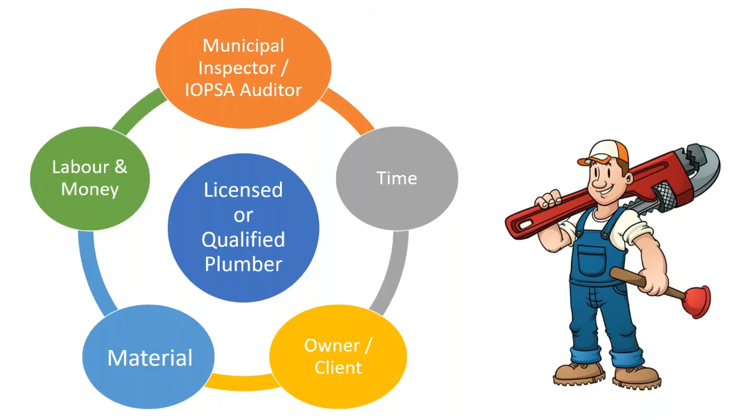When we're looking at a licensed or qualified plumber doing work, there are a number of factors that need to be taken into account. Stresses and pressures that are being applied from all over. For argument's sake, we're looking at that on top because that is where the final closeout of that project falls. But in the meantime, the plumber's got to worry about labor, money, time, the owner, material, all kinds of other things.

So the one thing that you do not notice on that list is paperwork. We're all familiar with this little slide or meme, whatever you want to call it: the job is not done until the paperwork is done.

Before I get into the actual plan requirements, you would have seen this thing a number of times before on some of my presentations. Let's call this the level of authorities. We've got overarching legislation, the Health and Safety Act and the Consumer Protection Act, which basically covers everything else. Then we have the actual legislation, the acts, the National Building Regulations and Standards Act.

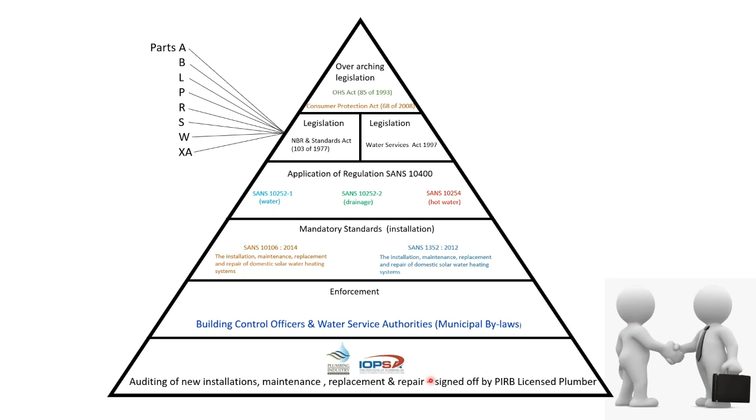So you'll see I put this in here on purpose. We're not here to start a fight with the local authority or the building control officer, because I can guarantee you that's one you're not going to win easily. So we'd rather come in peace, and see that there are some common grounds and benefit for both parties in working together. So there are two sets of building plans, or two aspects to submitting a building plan.

The first one's water. Let's look at water, and let's settle something very early on. Every other week or every other day, you hear people talking about how water is not in the building regulations, only fire - or that building control is not worried about the water installation on a building because that doesn't form part of their very important National Building Regulations and Standards Act.

In that same SANS 10400 Part A under the admin, although this falls under the informative section, it is very clear that it says the Water Services Act enables the Minister of Water Affairs to prescribe compulsory national standards - not nice to have, not this way or that way. It is a compulsory national standard relating to consumer installations, and in this regard it defines a consumer as any end user who receives water services from a water services institution, including an end user in an informal settlement.

A consumer installation, which is what we are busy with, is a pipeline, fitting or apparatus installed or used by a consumer to gain access to water services, and it includes a meter attached to that pipeline, fitting or apparatus.

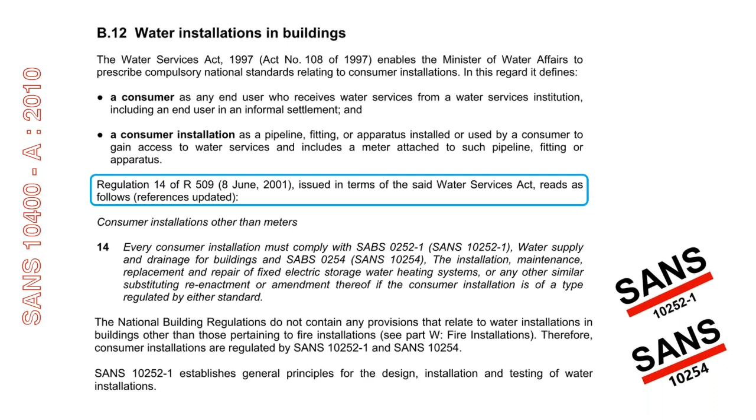There are requirements, and when I spoke to Steve about doing this presentation, this session is in order for the plumbers out there so that when you see a building plan or something you need to quote on, you need to make sure this document, if it hasn't got stamps on it or a note saying it's been approved, please revisit or confirm with your client that this is indeed approved, and that would be your starting point. If there's any dispute, for the guys that remember, we did the TAC resolution around rational designs and that.

Once you've notified your client, whether it be the owner of the building, the developer, the builder, the architect, or the local authority, that there's a problem with the design, or that doing the work as per the design is going to end up being a non-compliance and couldn't be signed off, then that notice forms part of your COC that you'll sign at the end, but you have to do that up front.

It's not once the building inspector gets there and fails the job, or the water and sanitation department's plumbing and drainage inspectors in some local authorities, that's not the time to go hunting for a design.

So if we look at water, initial design considerations, straightforward: the following information as necessary shall be obtained from the owner of the premises or from the water supply authority or the designer. Take note, there's no plumber there.

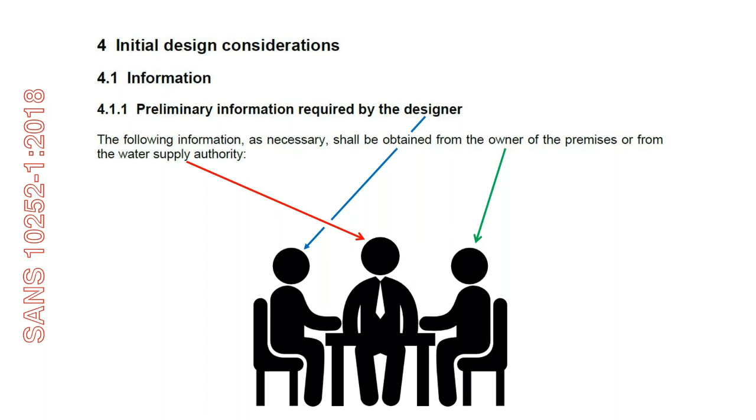You're more than welcome to assist, or you'll probably get contacted if you're one of the more senior guys in the group or in the session. You'll find this would be approached by the client, or by an architect or designer for some help. But notice there's no plumber included in the standard—it says these three people will be responsible for that design.

Included in that design will be a plan of the site showing contours, proposed and existing floor or terrace levels, all related to a geodetic datum, and the location and description of any services on site.

Why would that be important as far as our plumbing is concerned? For every 10 meters of elevation, you're losing more or less 100 kPa in pressure. So if it says existing floor or terrace levels, and you're looking at 10 stories at plus minus 3 meters each, that's 30 meters.

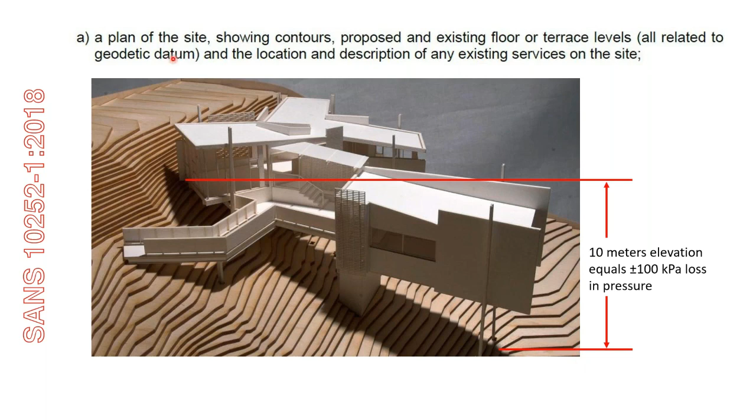So 30 meters has quite a considerable impact on your actual water supply. When it comes to a design, that's an issue, so the requirement is for levels all round.

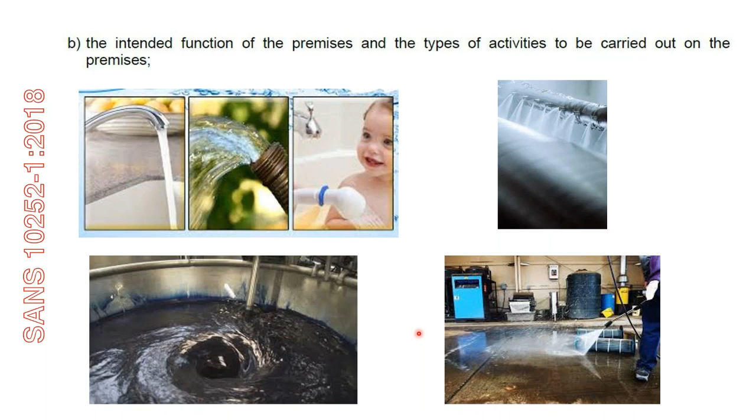The intended function of the premises and the types of activities to be carried out on the premises—in other words, is it a normal residential H4 dwelling? You'll see paper milling, industrial cleaning, textile dyeing, whether manufacturing or dyeing, the volumes and the actual supply quality or pressures all accounted for.

Point C says you need a drawing of the building showing the points that require water and the proposed type of sanitary fixtures that go in there. If you look at this layout, you'll see it's very clear. So now when you look

at the plan as a plumber, and that's what most of the council guys do—oh yes, I can take that waste pipe out there, that's outside—that could be done quite easily, as opposed to some other designs that we'll have a look at a bit later on.

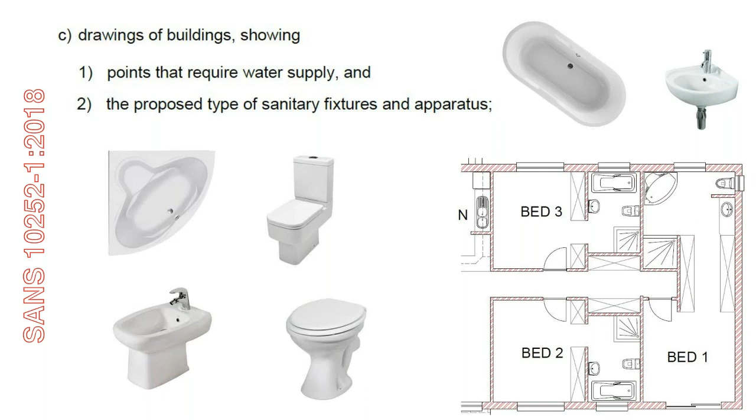In bigger, more upmarket or expensive buildings, there's usually a schedule of sanitary fixtures and apparatus requiring water supply. When this comes out, whether as a bill or an attachment or one of the sheets on the building plan submitted, it's the perfect opportunity to look at a product and check the code. When quoting and you see a name you can't pronounce or aren't sure about, mark it with a question mark. Then as you go through the list to price, confirm which are compliant products, ticking the ones you have a query on, even before buying the material.

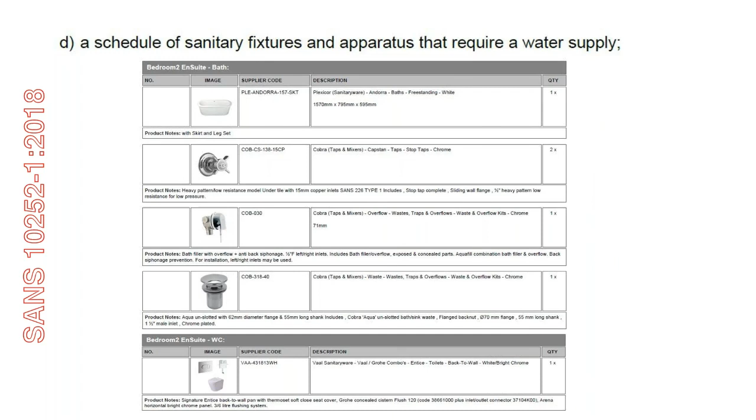E says you need the design population of the premises and the times the premises will be occupied. That relates to water consumption, energy efficiency, and overall supply design. These are different tables from various documents. I picked H1, a hotel occupancy where persons rent furnished rooms not being dwelling units, as opposed to H4 which is a normal house. The design population for H1 is 2 people per bedroom, since most hotels have double beds. The design occupancy time for H1 is 24/7, because you've got people cleaning, staying over, coming in late or early, so it's occupied around the clock. That's for E.

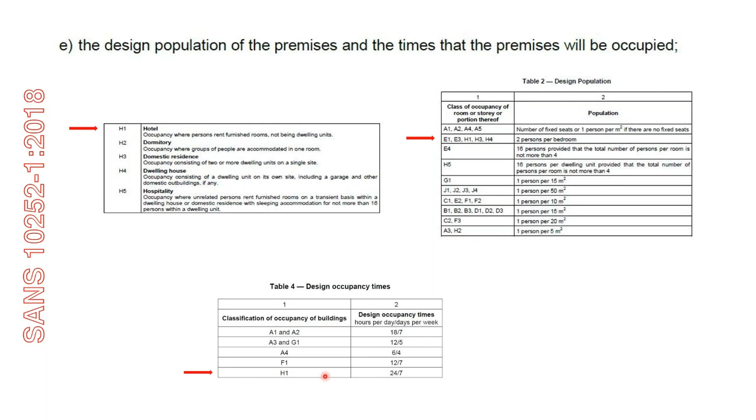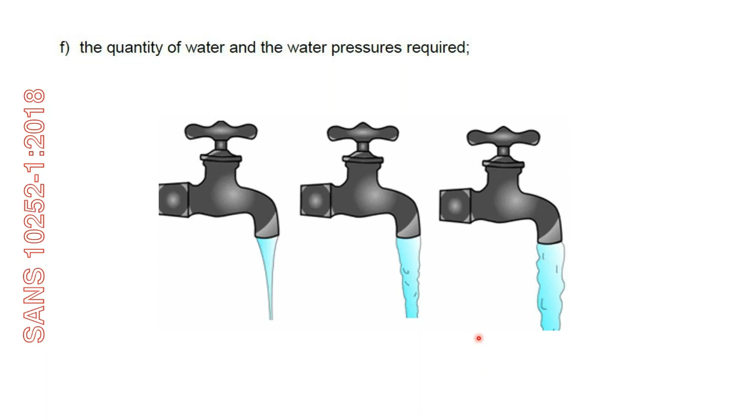Next is the quantity of water and water pressure required. We looked at that industrial cleaning example earlier. A normal single residence isn't as big an issue as a 10 or 15 story hotel or a university dormitory. So the plumber needs to know this quantity from the building plan submission, and that needs to be sorted out between the client and the designer.

Then there's the nature of the subsoil on site. For those who attended the 10252 part 1 sessions, you'll know copper can't go into ash, or anything with salt or ammonia, and you'd look at PVC pipes in heaving clay. There are various restrictions on what material can be used in which areas, and that forms part of the design.

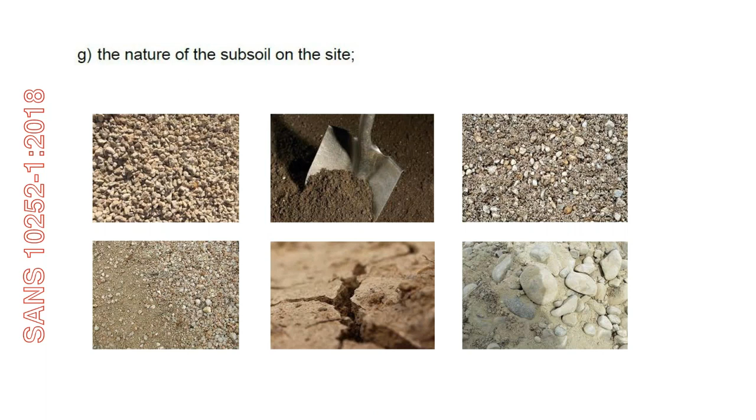And then the quality of water obtainable from the supply mains. This one is difficult, guys - I could have just put a normal glass of water there.

Instead, let's look at this table quickly. You have raw water from dams and rivers, which gets piped or gravitates down from the catchment area to where screening happens - removing fish, branches, leaves, and bigger debris. Then coagulant is added, which looks like purple-colored salt crystals. You throw those crystals in, and as particles and dirt attach to them, they settle at the bottom of the sedimentation tank. Then it goes through filtration, with different types used in different areas by different local authorities or water supply authorities, though they basically work on the same principle. Then pH correction and anti-corrosion agents are added to protect your plumbing from being eaten away, followed by chlorination, and that's how it ends up at your house.

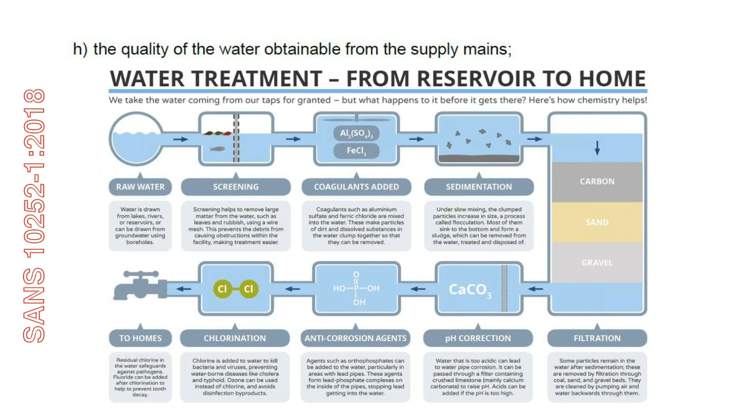So when it comes to the quality of water obtainable, these processes differ from region to region, from one water supply authority to another. If you have a hard water area, or water treated differently than other areas, the local authority can advise you on the quality of their water. It should be SANS 241 Part 1 and 2 compliant, but it's best to confirm with the area. Once you've worked in an area for a while, you know what you're up against compared to other areas.

The static and, where possible, residual pressure in the water supply mains. So static being what is available to you, and residual being that once the design has been done, or the pipe sizing and fittings and all the rest have been done, whatever remains in that installation, that would be your residual pressure.

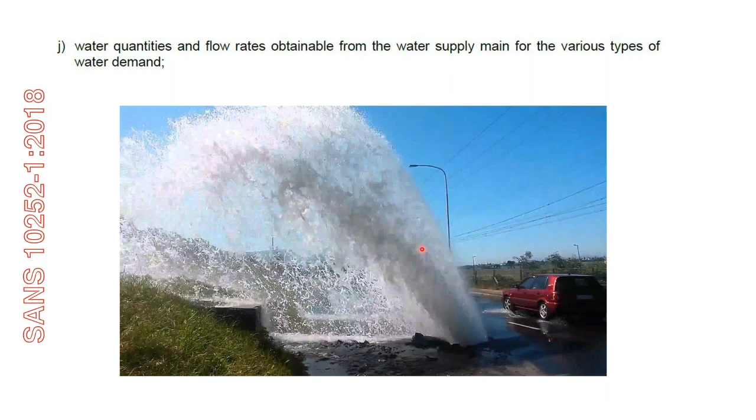Water quantities and flow rates obtainable from the water supply main for the various types of water demand. So if you had to build a house on the left-hand side here, and that's the supply main in the street, you know you're not going to have a hassle as far as getting water to your premises is concerned. Okay, so a bit of homework to be done between the designer and the owner.

Schedule of acceptable pipes and water fittings and the size of the water meter. Requirements for drawings and other information that has to be submitted in order to obtain approval. Any special precautions to be taken for the crossing of other services on the premises, and details of existing connections and services.

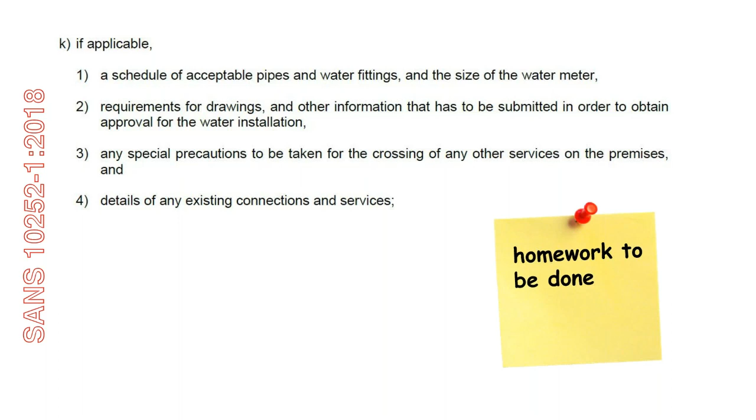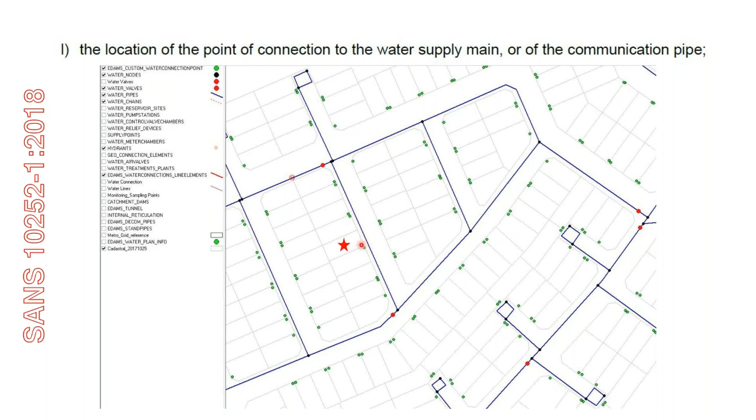M says we need details on the metering of the water installation, and that includes sub-metering. A couple of local authorities, when you try to submit building plans with multiple units, will actually inquire as to your sub-metering, because unless there was provision made, you'll find that guys will rather apply for exemption because there's no room or they didn't know about it. It is now part of the requirement, metering of the water installation. In other words, not just the bulk supply, the whole installation. So it includes the sub-metering.

If the owner has to connect the water installation to the water supply, the following details: if it's to be connected to the mains or to the communication pipe, the details of the size and type of material of piping, and if the installation is connected to a water meter, the details of the size and type of outlet of that water meter. So this would be for a UPVC main bolted on there, and then you carry on the other side of that water meter.

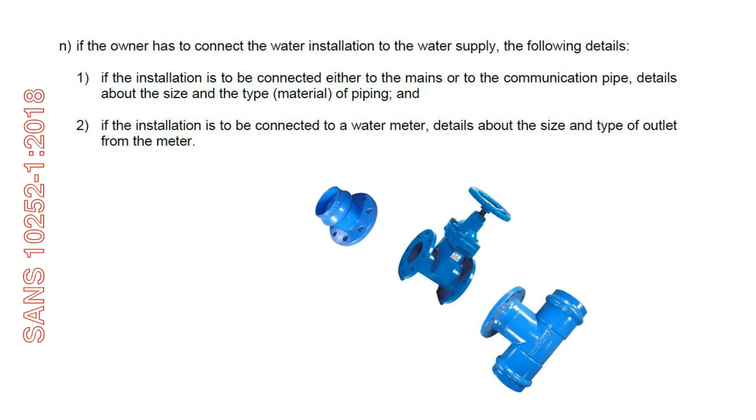Then just a quick look at some of the notes. Items A to E and G can be obtained from the owner, F should be determined by the design process, and H to N should be obtained from the water supply authority. So basically what we've gone through at the moment, you'll see that the owner is responsible. He'll tell you he's got the idea. He will tell you what the purpose of the building is, what type of fittings he wants to use, the schedule, how many people are going to be in there, subsoil.

He bought that property, so between the designer, the local authority and the owner, they should have that information. Quantity of water required, that would be for the designer. Sometimes a dangerous thought, but the quantity of water is there. And then the water supply authority, or the local authority, municipality, whichever way you want to refer to them: water quality, pressures, flow, services, connections, metering, and size of the connection. All of that can be obtained from the water supply authority.

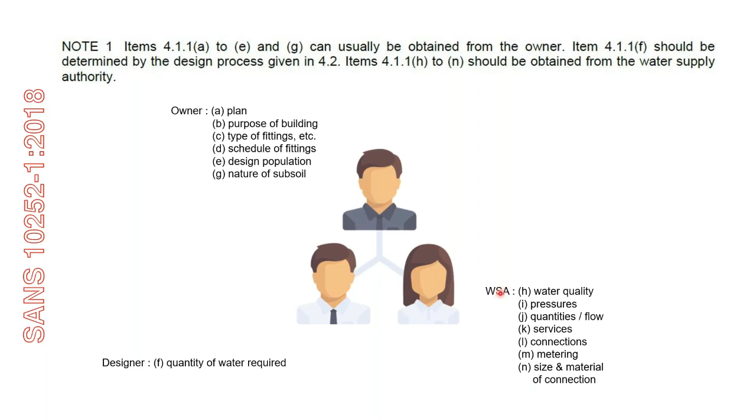Note 2. Information required for the approval of water installations.

Title deed, we're not going to worry about. Name of every street on which the premises abut. So you'd like to know where it is.

Scales of the drawings, north point, position and size of the communication pipe serving the premises, location of every water fitting and its description, location and capacity of every storage tank and water heater. Take note, water heater as well. Details of the proposed accommodation for the water meter, if it's to be installed within the premises, the pressure for which the installation has been designed, and the position of overflows.

So if we do a bit of semantics, overflows could be discharges. Let's have a look at those. You see the smallest one right down the bottom, last but not least.

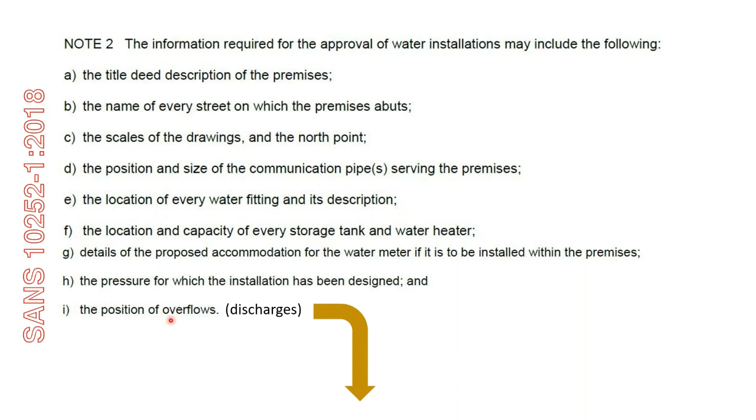If we are looking at discharges, we're looking at drip trays, where the water storage heater, complete with its components, is installed in a manner and position where any leakage can cause damage to the property. It shall be furnished with a drip tray.

So that's what the plumber's book says. You'll find, by the way, for the guys taking screenshots, the bit down the side is the reference to the actual document that was taken out.

So snap away. Then it says here that the tray shall be led to the outside. By the time the design is done and the owner and architect have sat down and looked at this, the client says, but sir, I would like exposed trusses. So they go, okay.

We can do that, put a note on there, we describe it to the T, and then the plumber gets there and he goes, okay, but now I need to take a tray out. That could be boxed in like that back section.

So how do I get this to the outside if that's currently being built, or that is part of the building, and this is in a proposed extension? How do you run it through there? These things need to be sorted out up front.

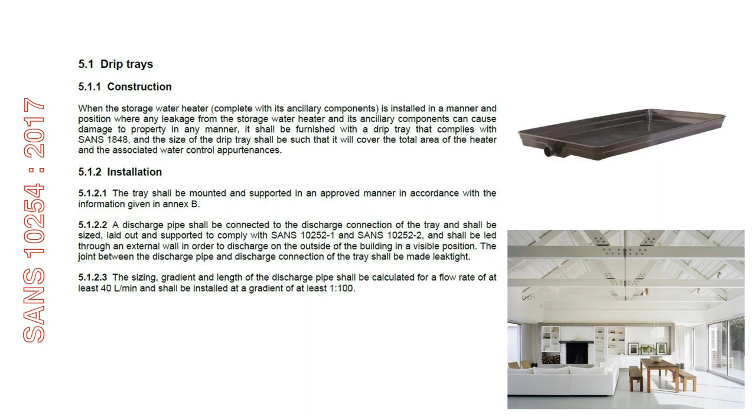If not, you might find that you run into one or two of these where the only way past that was a concrete beam over it. We don't need any of that.

This one here, the squeeze was so tight you couldn't get it further out towards the outside, so you had to do a bit of a MacGyver to get it going back to the outside.

Or if you're really in trouble and the designer says, you know what, it's only a 50-liter geyser, let's not bother about a tray or anything above the ceiling, then the plumber gets left with a comment like that, or this is the installation that you end up running into.

It becomes the plumber's problem. And nowhere in this document has the plumber ever been mentioned once. We're getting to that still.

Discharge from valves, from 10254. It says that discharge pipes from expansion control and safety valves shall be of a size not less than the connection. It shall be a maximum of 4 meters, and after 4 meters you increase the size over the total length up to a maximum of 9 meters.

So if we now look at this building here, that requirement under note 2 says show the hot water cylinder. So we've shown it, or someone has shown that on this very simple drawing.

The building's 22 meters, so if we're in the middle here, that's 11 meters to the outside. There's no way that's more than 9 meters. So somewhere along the line, when this drawing gets put in front of you, you need to go, hold on a second, we can only have a maximum of 9 meters.

Can the hot water cylinder be repositioned? Yes, then move it to the right place. The note says show it on the drawing as to where it should go.

Not, okay, the plumber comes to site, oh no, look here, we can't do this more than 9 meter thing, I say we move it over here. That's not your job. It's a handy thing to have a plumber like that on site, if he can actually advise you into which way we can make the thing work.

But then by changing that design, you actually become responsible, because the client will come back in 2 or 3 weeks, your geyser's up, everything's there, and he comes along and says, but I don't want the geyser there, that's going to spoil where the kids need to play, and someone needs to move that.

So unless it's in writing, if it's not written, it's not said. So unless you have a VO saying that we can deviate from this approved layout or this submitted and approved drawing, then you know you're in for a bit of moving around and chasing your own tail at your own expense, because the original design says that's where it should be, and it was never clarified after that.

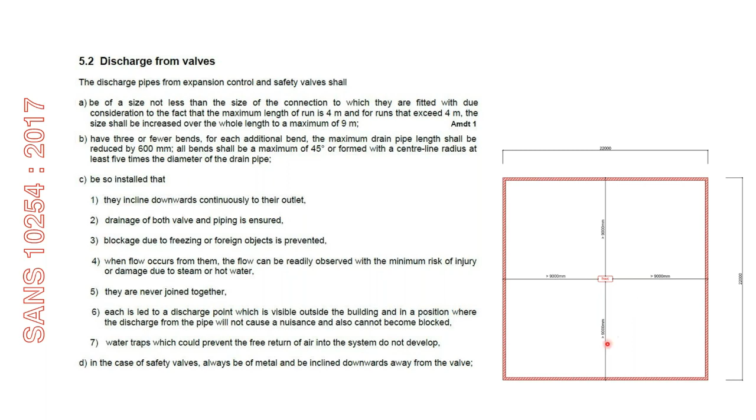Short and sweet of it is, we've looked at the requirements for building plan assessment, or the information required on the actual building plan indicating water or the water installation. If you look at 10252 part 1, 4.1.2.2, where water supply installation is to be extended - in other words, you've got an existing system - the existing system shall be examined to ensure that it's suitable for extension. So it's not, you know, maybe if he's a decent architect he'll do it,

or maybe we can ask the plumber while he's busy here. It says there the existing system shall be examined to ensure that it's suitable, after which the entire design shall be reassessed and modified by the designer as appropriate.

Our local authority - fortunately for the plumbers in the region, I'm involved as far as the plan approval is concerned - when you do a submission of a building plan to the Nelson Mandela Bay Metro, we actually ask for a water reticulation layout and pipe sizing. That needs to be on the drawing.

I know it's not a legitimate requirement as far as residential premises are concerned. It's normally for the bigger buildings when it comes to sizing. But as far as the local authority, we require that you indicate pipe sizing, should it be upsized, the material used, all types of material available out there. So put your notes on your plan. Your client pays you to do a submission of a building plan, so put it on there and we'll assess your drawing as you submit it.

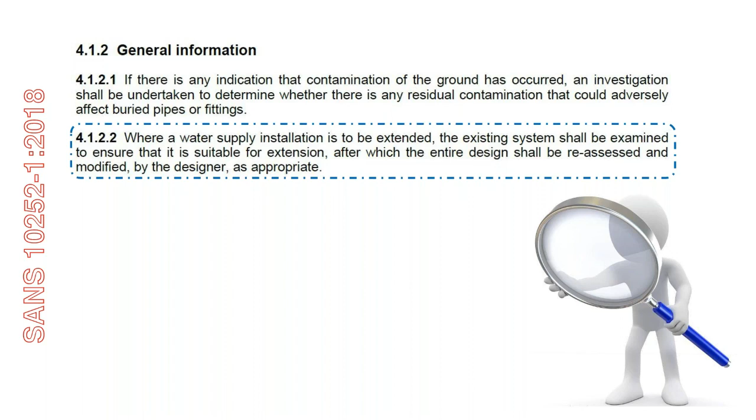One of the reasons we tended to do it on all plans was that you do get buildings that change use. So when we're looking at change of use, all of a sudden Part T becomes a reality in people's lives. Here you can see, in this case, there's a half-inch supply to that hose reel at the back of this industrial building. So good luck putting a fire out with that and persuading your insurance that that was sufficient protection. Here you've got a 22 mil polycop.

So it's plastic, it's undersized, it's all kinds of things, but it won't fly. The thing around hose reels is simple: for the purpose of firefighting, they'll be installed in any building of 2 or more stories in height, or in a single story of more than 250 square meters, at a rate of 1 per 500 square meters or part thereof of floor area in any story, provided that such hose reels shall not be required in H4 - in other words, residential dwellings - or in an occupancy classified as H3, which are sectional title units, where each unit is provided with independent access to ground level.

So if you have your own little unit in a sectional title complex and you can get out of the building, whether it be back or front, then you're sorted. If it's a high-rise thing and you've got one escape passage and it is more than 2 floors high, then you'll find that that would require a hose reel.

The thing is, even if it's a ground floor like a normal house - I'm sure most of you've got areas or regions in your area where they've taken older houses and converted them into offices, or a guy might run a home office or a small business from what used to be a normal house. If there's anything in storage, there's a requirement for fire protection. So if your existing system is a half-inch polycop supply from the water meter to the building, then rest assured that your fire protection is going to be insufficient. So when it states size, or when it requires size, these things do play a role.

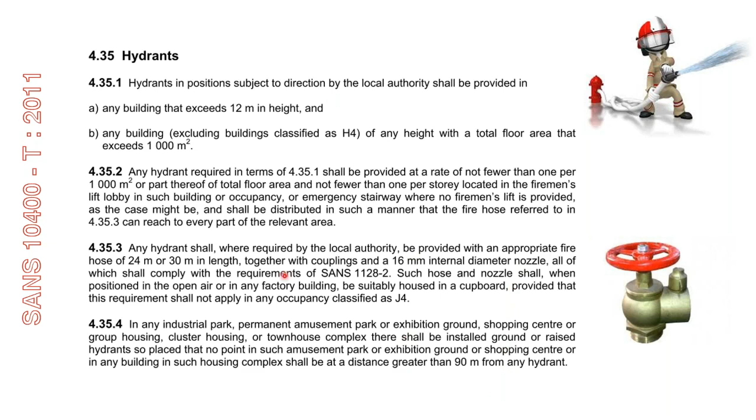The reason I pulled in the hose reels and the hydrants is for the simple reason that if we go back to SANS 10252 Part 1, which is our document, pipes in any fire installation or combined installation - so you don't necessarily have to have a fire installation, it could be a combined installation.

Shall be combined, being potable and fire, shall be sized according to a rational design, where in any fire installation the nominal diameter of a communication pipe serving such an installation shall be at least 75 millimeters. So if there's a fire installation or combined installation, you're looking at least 75 millimeters. A pipe supplying a fire hydrant shall also be at least 75, except where the length of that pipe exceeds 50 meters - then the nominal diameter of that reticulation shall be 100 millimeters.

That is for the premises. So once you've got an incoming main of either 75 or 100 millimeters in diameter, we now move into the building, and it says a service pipe supplying water to a hose reel on any one story of a building - so you have to picture multiple stories, say 2 or 3 stories high.

It's in excess of the 1,000 square meter limit or allowance that was made, so now we need to know the requirement per story. Once again, for the guys that haven't attended the water one, this is how you cheat on it: you see the 2 from 25 says 1 or 2, the 3 says 3 hose reels, the 4 says 4 or 5, and the 5 says more than 5.

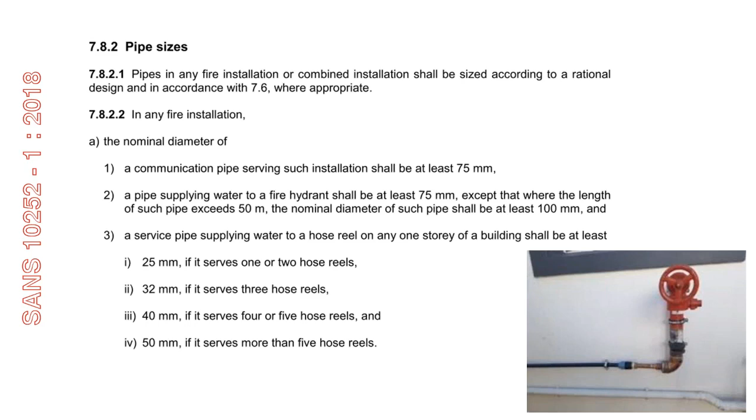Between the shuttle valve and the reel, if I remember correctly—sorry, let me just get back to my notes—that would be the arrangement. You have a union between the hose reel, and then you have that specific fire stop tap. It's not a ball cock or ball valve; it's one of these slow turning taps. That is the accepted practice when it comes to installing a fire hose reel. Trying to think why I would have failed the copper, but as far as I can remember, that is a standard connection for a fire hose reel.

We are going to get those questions on an email, are we, Jock? Yes, we are. Okay, then I'll follow up with that gentleman. But that, as far as I know, is what a service core connection to a fire hose reel looks like.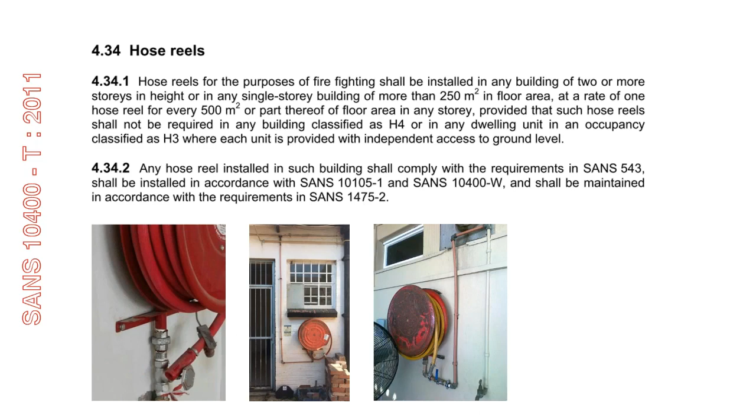Right, the next one. Is non-return allowed on fire? It's not only allowed, it's compulsory. The standard says that any connection between potable water and fire water shall have backflow prevention. Depending on the position and actual layout, most of the time where the potable and fire supply split, that is where your backflow prevention is—so that if extra pressure is applied or that filthy water gets into the fire system, we don't want that coming into contact with a connection of potable water. So yes, most definitely it's a requirement.

If the metered outlet is too small, do you therefore have to contact the municipality to change the meter accordingly, so that you may have sufficient supply for both fire and usage? Yes, it's part of the plan approval process. You'll find, I know eThekwini's got water inspectors—we've got a couple of guys that do these plan assessments for the water network. If you motivate or indicate on your plan why you would need a bigger water meter, they'll work out a cost and come and do the installation of that upsized meter. So yes, that's the theory.

Can a fire main be part plastic if below ground? Yes, look, you do get UPVC mains underground, and then when they branch off, the standard says anything above ground can't be plastic. So if it's UPVC underground—by the time the soil is heated up enough to melt that PVC pipe, I think there'd be nothing left of the building. So yes, if it's underground, definitely underground—I'm not talking about just under the surface, or maybe there's a changeover between the metal and the plastic. I'm talking about underground—that would be acceptable, but anything above ground needs to be metallic.

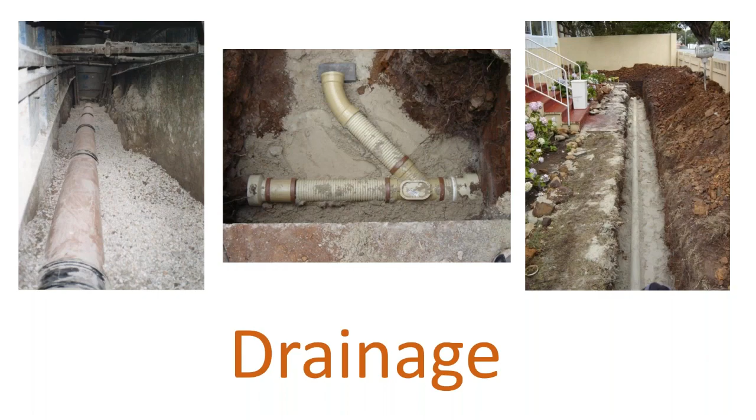When we're looking at drainage, the building control officer looks at drainage completely differently to how they look at water, because Part P is part of what they should be enforcing.

So I only put your National Building Regulations - it should be the National Building Regulations and Standards Act, blah blah blah, but for short, NBR P2.

Listen to these following requirements, and then think about how many drawings you see that do not have them indicated. We'll go through them all, but just quickly.

Any drainage installation in any building shall be designed and constructed so that there's an adequate number of sanitary fixtures provided in relation to the population and class of occupancy of that building. Yet we still have people standing in queues in public buildings trying to get to a toilet.

Such an installation is capable of carrying the designed hydraulic load. Such an installation is capable of discharging into any common drain, connecting sewer, or sewer provided to accept such drainage or discharge.

All components and material used in an installation is watertight. No nuisance or danger to health will be caused as a result of the operation of any such installation, and any drain in that system is of such a strength, having regard to the manner in which it's bedded or supported.

That it's capable of sustaining the actions to which it may normally be subjected, and that is, where necessary, protected against damage. All sanitary fixtures are located so that they are easily accessible to those persons they intend to serve.

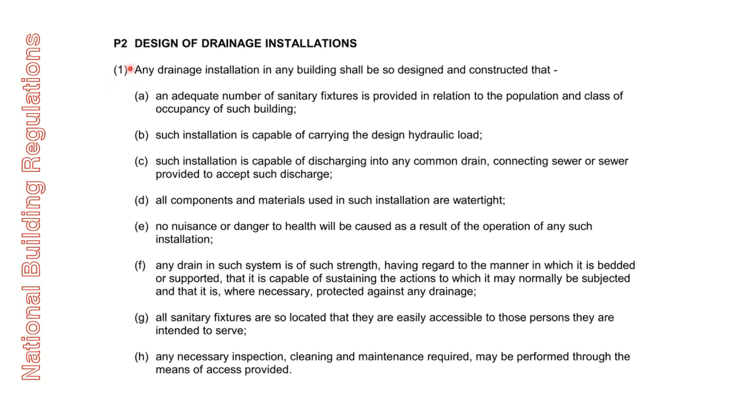That's P2(1). P2(2) is the kick in the gut for most designers that aren't qualified. The requirements of sub-regulation 1, in other words what we just looked at, shall be deemed to satisfy where that installation complies with SANS 10400 Part P. Take note, it says SANS 10400 Part P - in other words, the whole document.

You can't pick and choose, saying I'd like for this to happen and that to happen. You either comply with the whole thing or something else.

Provided that where a local authority is of the opinion that the size or complexity of that installation in any building renders it essential for that installation to be the subject of an approved rational design prepared by an approved competent person, that local authority shall in writing notify the owner of that building of its reasons for the necessity of such a design, and may require such an owner to submit for approval plans and particulars of a complete drainage installation based on such a design.

In writing - I can tell you already the surefire way to do that is you fail the applicant's plan, and once that plan is deferred with the comment 'drainage not approved, engineer's drawings required, or drawing from a competent person,' that is in writing. So the client will be notified, and they will get back to a rational design a bit later.

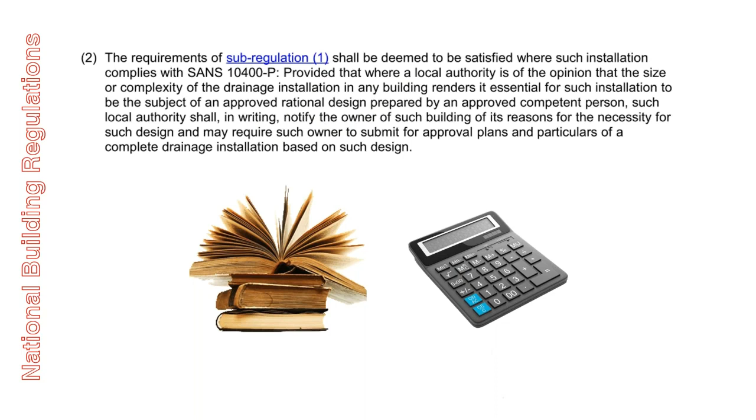Like I said, 10400 is the BCO's Bible, that's what they claim to operate from. So if we start with Part A, an application: the designing, planning, and supervision of the erection of any building or structure, or the performance of any function in connection therewith in terms of these regulations, is subject to the provision that the person undertaking such work or performing such function is required to be registered.

Take note - so the person doing the designing and submission of building plans to council shall be registered in terms of the Architectural Profession Act, Engineering Profession Act, Natural Scientific Professions Act, Professional and Technical Surveyors Act, or any other relevant act.

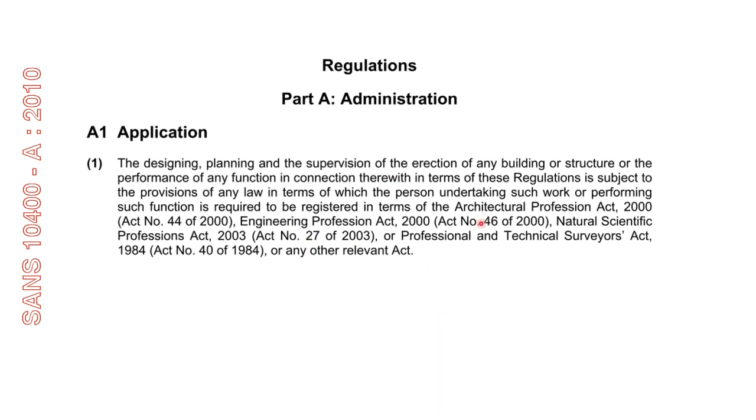It does not include plumbers. It does not say, nowhere does it mention a boumakelaar plan. It doesn't say, 'you know, I was in a tight spot, I had an afternoon to do it before the tiler or the guys putting concrete down came in.' It needs to be done by those professionals taking responsibility for that.

A2 says that any person intending to erect a building shall submit to the local authority the following plans and particulars together with the application: a site plan, so we know what we're doing or where we're heading on site; layout drawings, showing what those bathrooms look like, where the toilets are, where the ducts are; and a drainage installation drawing - good heavens, can you believe that? SANS 10400 Part A, A2 says you need to submit a drainage installation drawing.

How many of you have seen that?

Plans, drawings, and diagrams shall be of a suitable scale selected from one of the following. The site plan, we know we need that, so they can give it to us in any scale. The local authority may accept a scale not provided for, depending on what the designer did or how big the sheet is that they're submitting, whatever. The point is, along with the site plan, we need plumbing installation drawings.

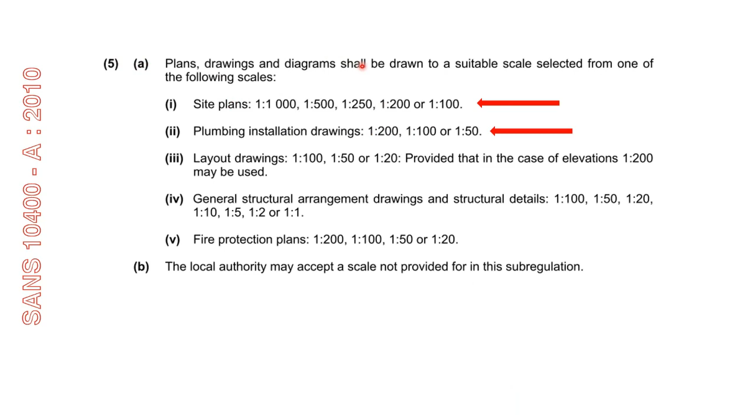Wow, we don't see those too often. The book says it shall be drawn to that scale - you need to submit that.

So it's not, 'you know what, Mr. Plumber, you're being difficult,' or 'Mr. Plumber, we'll get back to you or whatever.' It's part of the BCO's Bible that they refer to all the time - it's just a necessity for them to pull it out.

But those are just for the drawings. Let's look at the actual plan submission.

Any drawing of a drainage installation as contemplated in Regulation A2 shall contain as many plans, sections, and elevations as may be necessary to show, where relevant, the following.

Depending on where you submit in the country, you'll need floor plans and a layout section through the building, where you cut away the building to see if the drain needs to be suspended under the floor and that there's enough headspace. Elevations show the plumbing as well, so you can see the position of the stacks, where they end up going past windows or around them. We'll get to all of those, but the point is, the drawings shall contain as many plans, sections, and elevations as necessary to show this.

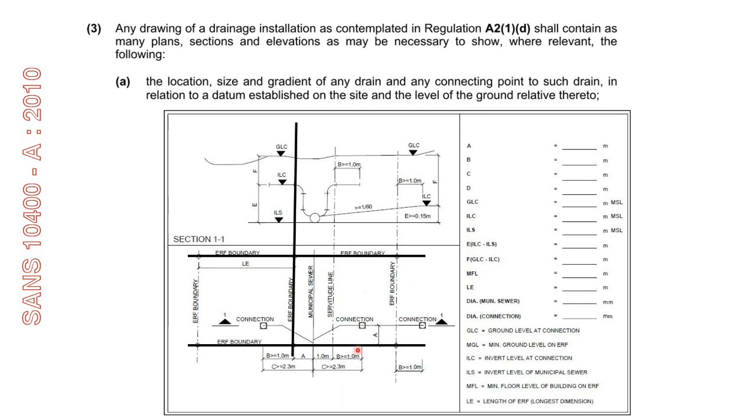I hope that answers that gentleman's question.

B says you need to show the location of any point of access to the interior of the drain.

Yeah, there's about 10 or 12 different places. This 1 hour session is too short for that. You'll have to have a look at one of the drainage webinars. What I can tell you is that there are 4 types basically referred to in these drawings. An inspection chamber, it's not a fancy name for a manhole.

An inspection chamber is a chamber not deeper than 1200 mils, and of dimensions that access can be obtained to a drain without requiring a person to enter that chamber. In other words, if you need to get a drain rod in there to clean a pipe or to gain access to the interior of a drain, not deeper than 1200 millimeters, and you don't need to get into it. An IE is there for purposes of inspection and testing, and to which permanent access after completion of the drainage installation need not be provided.

So when it comes to permanent access, years ago we used to have IE junctions on gullies, so that if you couldn't clean the gully properly, you ended up finding that IE, and you open that, you could then get access back towards the gully first of all, and into that line from that IE. But there's no permanent access. You actually have to dig it open to find it.

A manhole, is an inspection chamber of a depth greater than 750, and the dimensions are such that it allows the entry of a person into that chamber for the purpose of providing access. So a normal 1050 ring would be a perfect example. You slip the cover off, you can actually get in there, get to the bottom of it safely. There are health and safety requirements for working on these bigger pipes, but that wouldn't be applicable on residential properties.

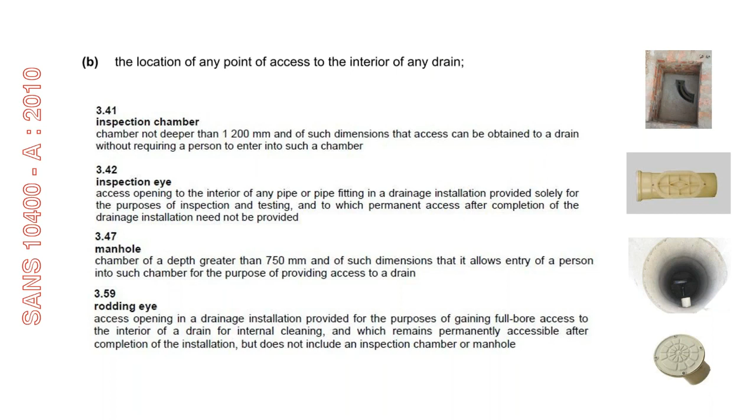C says the location of any trapped gully. Simple. Same building. Got a gully at this level here, so your flood level or your overflow protection level is up here. That means that if this pipe running down here blocks for some or other reason, whether it be the municipal reticulation or the internal drainage, or lo and behold, the council main with a connection out here onto the property. If something goes wrong, this becomes the flood level. In other words, the water would pour out around this area long before it hits the building.

So now the client says to you, but hold on a second, I don't want that smelly thing in front of my kitchen here or whatever. We take that waste pipe from that sink and we put it in the stub stack and we reposition the gully. So you look at that old drawing and you see, nothing has changed that much. We're just moving the gully, but in reality you're taking that overflow point and putting it at the highest point, because remember, this thing will go up and up. So anything below that is going to be under threat.

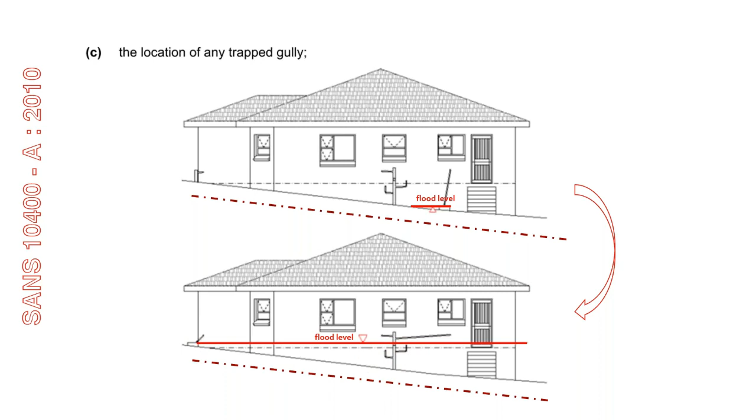So before the water comes out of that precast top on that gully there, those nice walk-in showers and bath traps and all these lower fittings are actually exposed. So by the time the water pours out here, your house will be flooded on the inside. Put in plumber's terms, that's what an overflow gully should do. Anything goes wrong, it spills outside here and it runs away from the house.

The location details of any septic tank, conservancy tank, private sewage treatment plant or sewage pump need to be shown on site where you're working. A conservancy tank is the one that gets emptied out, while with a septic tank you need to make sure the soakaway and the position of the tank comply. For on-site treatment works or pumps, you need to know where they are and what they're doing.

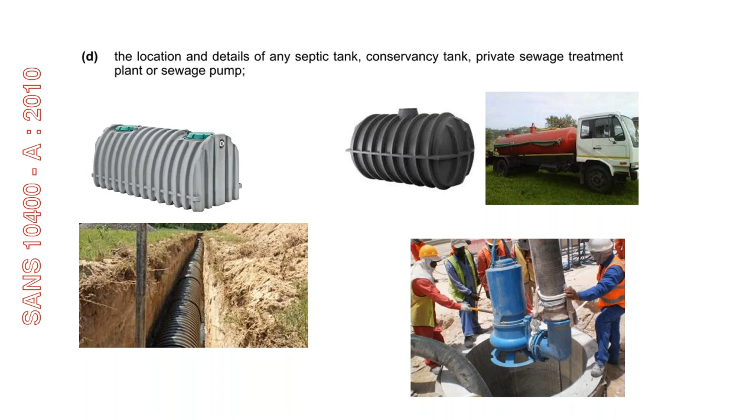For guys working in rural areas, the location of any percolation test holes excavated on site, or any French drain, needs to be shown. Simple reason.

It sounds simple enough, but the problem is you could have a triple-story building approved on a farm where this guy wants to put up a hunting lodge. Fact of the matter is you get there, start the drainage, work yourself up to where the soakaway is going to be, and then realize this thing was supposed to have been tested - that little cube dug at the bottom of the trench should have been filled with water.

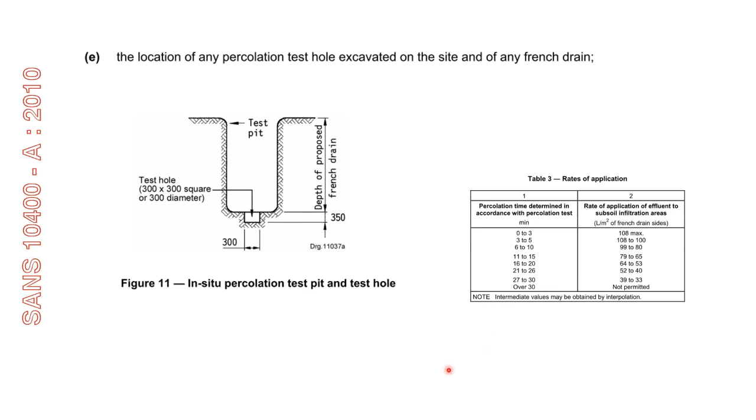If the rate of application takes longer than 30 minutes, it's not permitted. If it sits and goes to around 27 to 30 minutes, which is basically almost nothing, then you're looking at 39 to 33 liters per square meter of drain trench size. There's a calculation in SANS 10252 Part 2 and SANS 10400 Part P that explains the surface area of that trench is where the water soaks out. So the point is, if you're going to dig a trench, someone needed to make sure beforehand that you don't end up in clay or rock where you don't have enough percolation rate to make this tank work.

The location and arrangement of any sanitary fixture served by that drainage installation - now these two examples are the exact opposite of each other.

Here we can see a bigger, fancier design with three nice plumbing ducts, and you've got access to those ducts to work in - access there, and access there. So you'll pick up all these toilets, either into stacks here, and that drain could go from here to the outside, or from duct to duct to duct and then out of the building. You've got all the fittings shown - these will go through the wall, that's not a problem, this will go into this duct. Everything backs onto a duct. Very nice, easy job - chop a hole through the wall and you're into that duct. That's where the drainage happens.

And then you look at this other one, and you look at the plan for location and arrangement, and go - wow, how would you get that? Where would you take that? If that's a wall, how would you get access to these toilets? Where would these showers go? How would you get these urinals back into something over there? These basins, how would you get them across the floor?

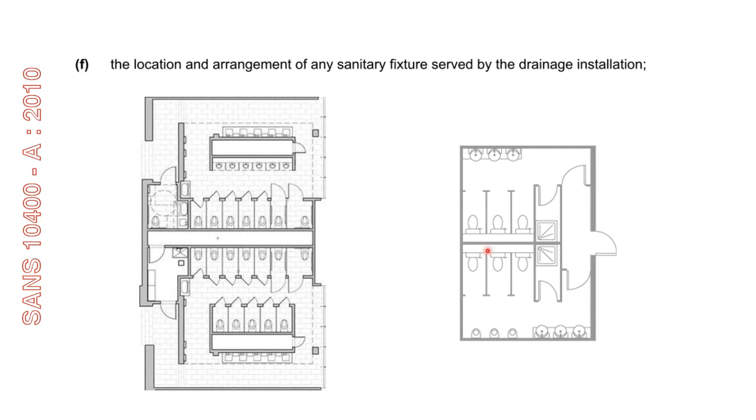So when you look at these two layouts, with this first one you actually feel like going to fetch your toolbox and fittings so we can get going. This other one, you look at it and think maybe I should just leave that to that bloke, I don't like that much - he could rather do that job. The problem is if a job starts like this, it's only going to get worse, because once you start with 'oh don't worry, we'll sort it out' or 'hold my beer, I'll show you' attitude on a job, you know that the first one will probably get signed off easiest, while this one is going to take some serious doing-it-yourself.

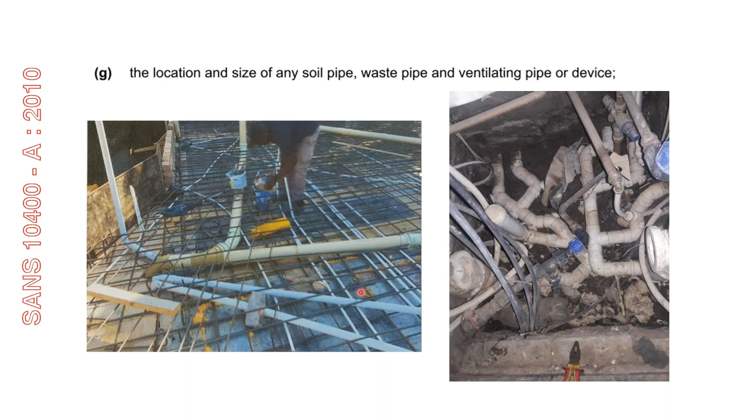The location of all openings in the building, such as chimneys, skylights, doors, windows, ventilating openings, and air intakes, which could permit the entry of foul air or gas into the building from any ventilating pipe or device.

Personal opinion, guys, it's happening out there. I don't know why they put this in here, because even if a stack is going, you'll find a whole lot of sites where that little puff pipe or that vent valve is right under the window. And if you don't want to be cheap and put a vent valve, why not just leave a vent cowl right under the window so the whole neighborhood can vent into your client's property? That's a requirement, and it happens far less than it should, but yes, it needs to be sorted out at plan submission stage.

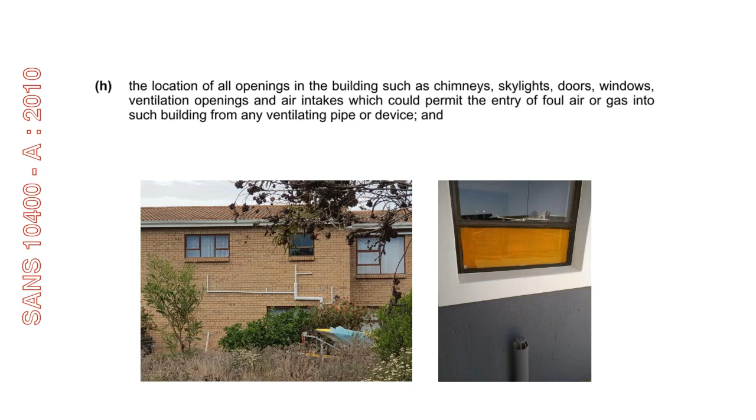The location of any well, borehole, or watercourse on site, for obvious reasons. You're at a 1.8 meter maximum soakaway, and you might have a borehole or well on that same premises. We do not want any of this water contaminating the groundwater, and then you end up starting your own recycling plant on the site without even knowing it.

So we say minimum 50 meters, ideally 100. That was the report done by the Water Research Commission way back when. I'm sure there'll be more scientific ways of doing it, but the fact is, 50 meters minimum - anything more than 50 sounds like a bargain.

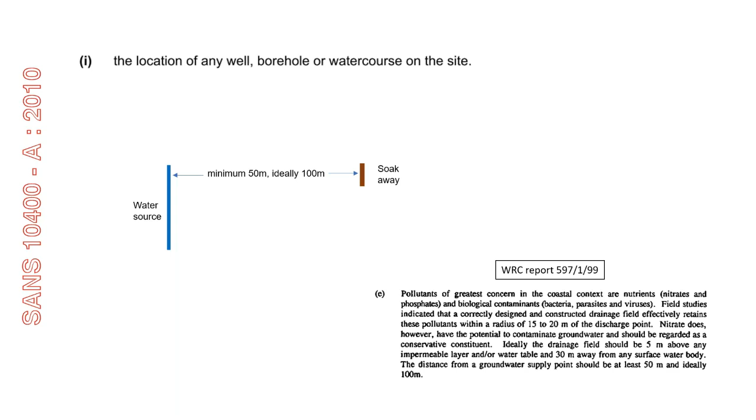The fact is, if the water or the borehole is not shown on site and the plumber walks onto site - we've had a case in Port Elizabeth where two small holdings out on the farms sued each other because one guy polluted the other guy's water, and the architect never realized there was a borehole on the other side of the fence.

The local authority may require drainage design for effluent. So you'll see on these designs a plan for how they'll treat it or discharge it into a pond or holding area. Anything that deviates from that design becomes the owner's problem. If you do it according to the drawing, and they then fail to maintain it or stuff it up somewhere along the line, that's not the plumber's concern, as long as it was done to that plan and particulars of that drainage work. If it was done accordingly, you're safe.

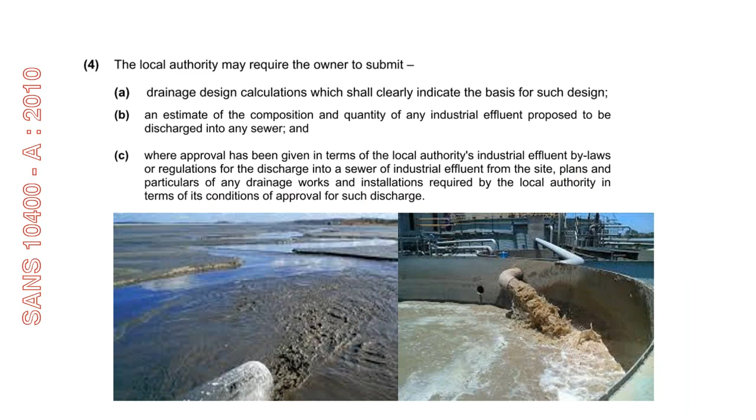We're almost there, guys. I see it's past 2 already, but we're almost there.

This schedule, or Form 1, is from SANS 10.400 Part A. The municipality will not accept a building plan submission without this form ticked and signed off by the professional at submission stage. So this is basically what it says: building classification H4, you're doing a dwelling. That professional has only 3 choices. Either they say Part P complies with the detailed requirements of SANS 10.400 Part P - whatever Part P says, we're complying with that - that's first up.

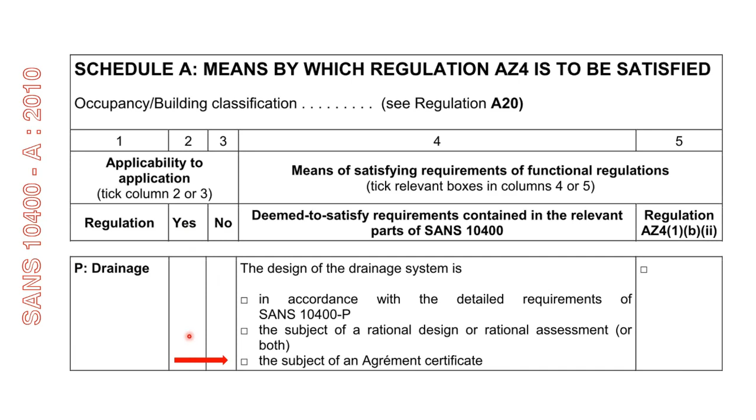Second option is the subject of a rational design or a rational assessment, or both, so you could appoint a competent person to do that. Or it could be the subject of an Agrément certificate. Those are the 3 options left to that professional as a means by which the regulation is to be satisfied. So AZ4, we'll have a look at now - these are the 3 options. If it's not on that list, you shouldn't even be submitting, because if this isn't ticked yes, yes, or yes, one of those 3 options, that means the system cannot comply.

Then heading towards AZ4, the functional regulation contained in Part P shall be deemed to be satisfied where the drainage installation complies with the requirements 4.2 to 4.27. 4.27 is the testing of above ground soil and vent, 4.26 is drainage, and you can work your way down from 4.2 - all of those requirements apply.

So if you skip one, you can't have 4.2, 4.9, and 4.13 just because they suit you and you skip the rest. It's either going to be all of that, or it's going to be the subject of a rational design performed by a competent person - sanitation, which by definition is only a wet services engineer - using the principles for the design, installation, and testing of sanitary drainage contained in this part of 10.400, or an Agrément certificate.

An Agrément certificate, in short, is a certificate applied for by a manufacturer for a non-standardized product. In other words, there's no SABS standard or SANS spec that they can have your product tested against. So what they do is take all of this, with test reports, papers, and a body of evidence, to the national regulator and say, we've got this beautiful system - it'll turn sewage into Coca-Cola, whatever. This is how it works, this is how we put it together, and this is how we test it.

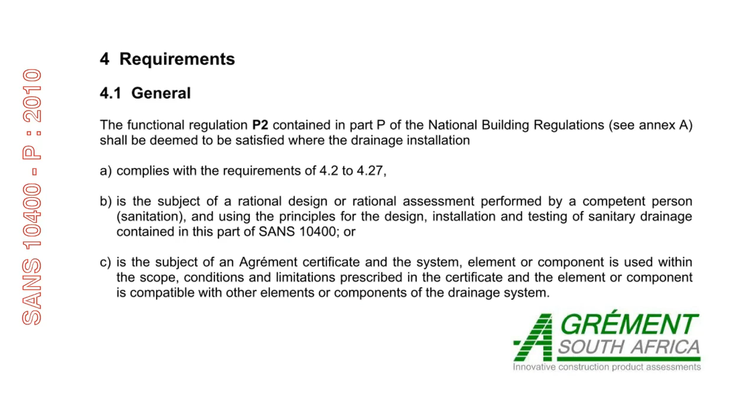An Agrément certificate is an option, but it's a very - I wouldn't say difficult - but a very complicated option. As far as plumbers on site are concerned and plan approvals are concerned...

A competent person who's registered in a category in terms of the Architectural Profession Act, Engineering Professional Act, Sciences Act, or any other relevant act, in accordance with the requirement of A19, shall prepare and submit to the local authority a rational design or rational assessment where compliance with the requirements is to be satisfied.

So this is what we just looked at - those different options that you do have. If this design is going to be dependent on a rational design, or done by a competent person, and it needs to comply with that building solution, that's easy enough. The guy can submit to council, they'll approve it and do the rest. As far as the plumber is concerned, by the time you have that design, you do the job accordingly.

If you see something contrary to that - like we discussed with that TAC resolution - if you notify your client or the professional upfront in writing that there's a problem with his design and it's contrary to these regulations, then basically you started off right and you've got yourself covered to a degree. Then the council will approve this. You had your say, or it wasn't necessary to do that.

At the end of this whole process, an approved competent person who did this design in respect of a system, measure, facility, parameter, or installation shall inspect and certify. In other words, no, Mr. Plumber, you the plumber on site don't sign the COC - the guy that did the design shall inspect and certify upon completion in accordance with the requirements of the construction, erection, or installation thereof.

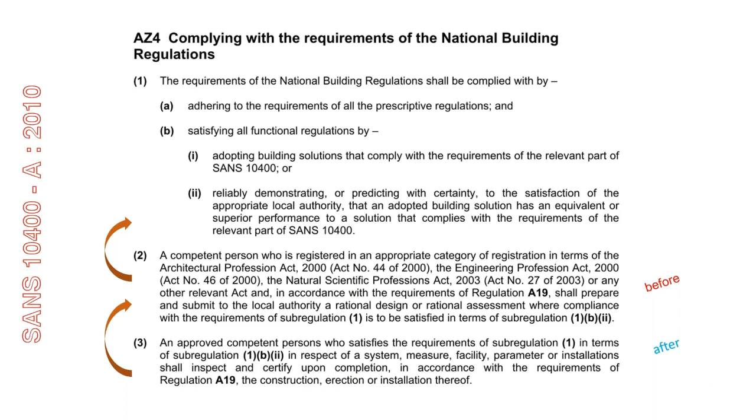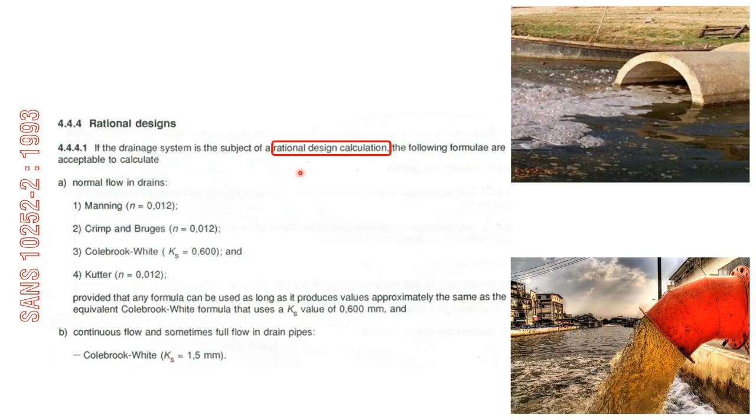So when we're looking at AZ4, you're looking at a rational design, and there are plenty around. Any fire installation according to 10252 is a rational design. If drainage is too shallow, has too little fall, too much volume, or too much of whatever is the problem area, you can have a rational design done according to 10252 part 2. 10254 says if you cannot comply with any provision in the standard, a rational design - and this, by the way, is a rational design - anything suspended from a slab, as far as cylinders and tanks are concerned, is a rational design.

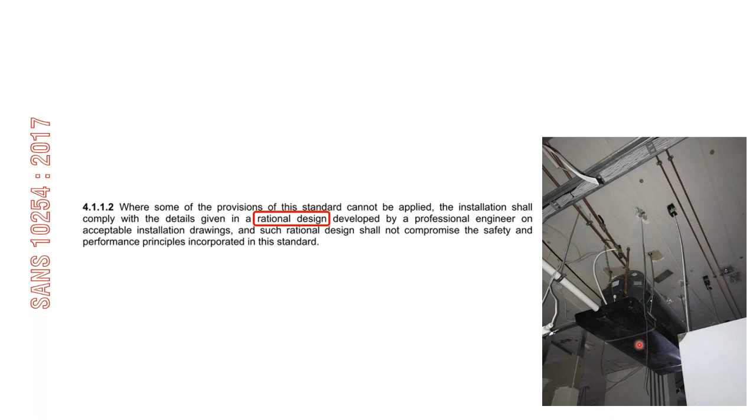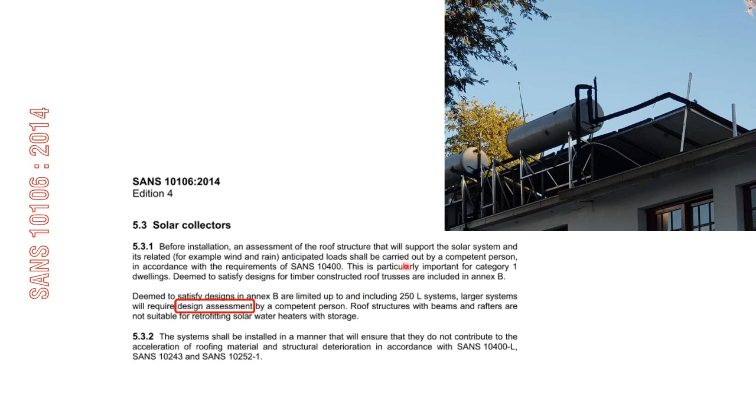Here we're looking at 10106, which says design assessments by a competent person when we're looking at roofing and where you're putting these things up. Before installation, an assessment will be done by a competent person. So that is also a requirement.

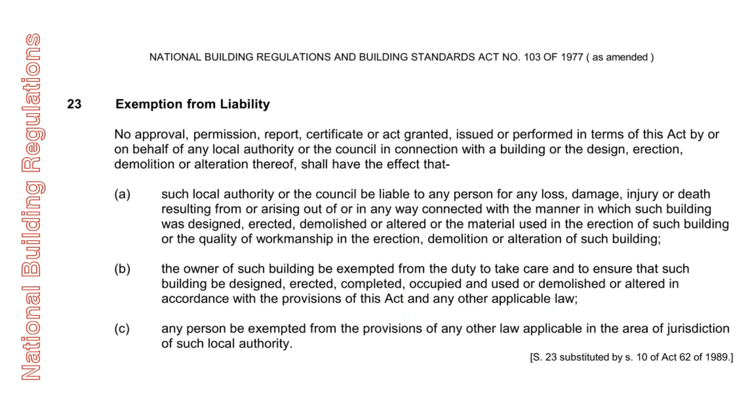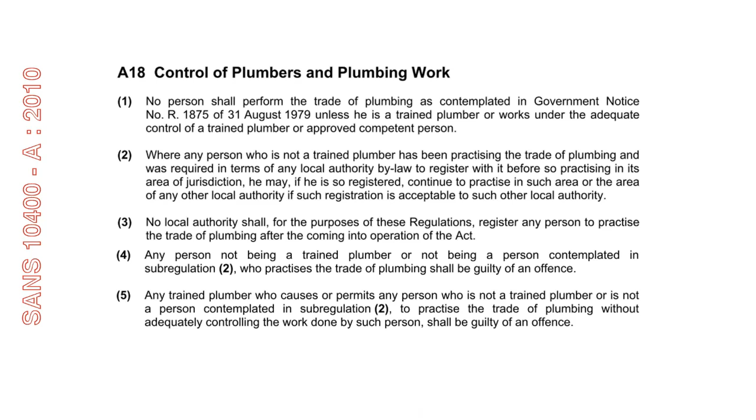So that's as quickly as I could get through water and drainage approvals as far as planning or plans being submitted to a council is concerned.